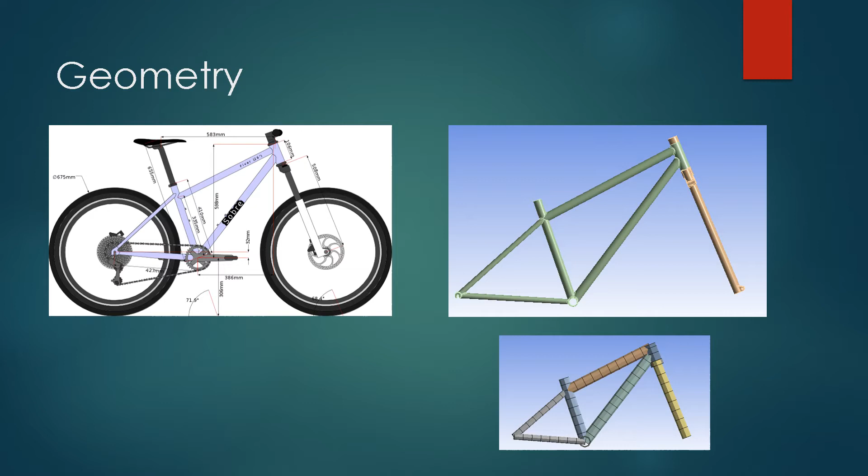The given frame and dimensions are shown in the picture on the left. The 3D model is shown to the right, and below that is the standard beam element model. Our reference frame is made of stainless steel with a Young's modulus of 193 gigapascals, a yield strength of 207 megapascals, and an ultimate tensile strength of 586 megapascals.

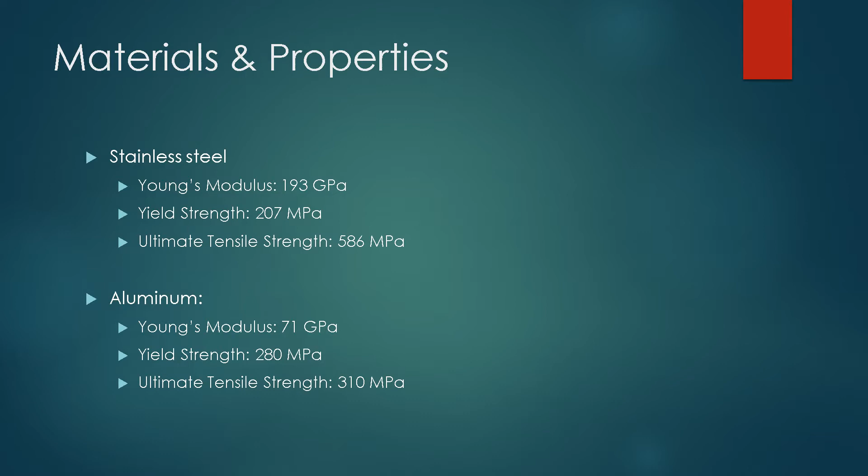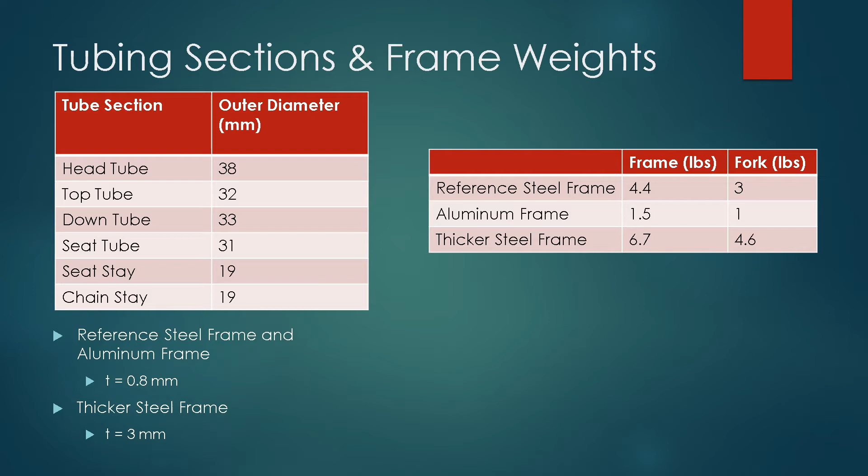We considered two loading scenarios in this project. For the frontal impact scenario, the rear dropouts were fixed and 100 newtons was applied to each front dropout in the negative X direction. For the drop scenario, the seat and the handlebars were fixed and 100 newtons was applied to each dropout in the Z direction.

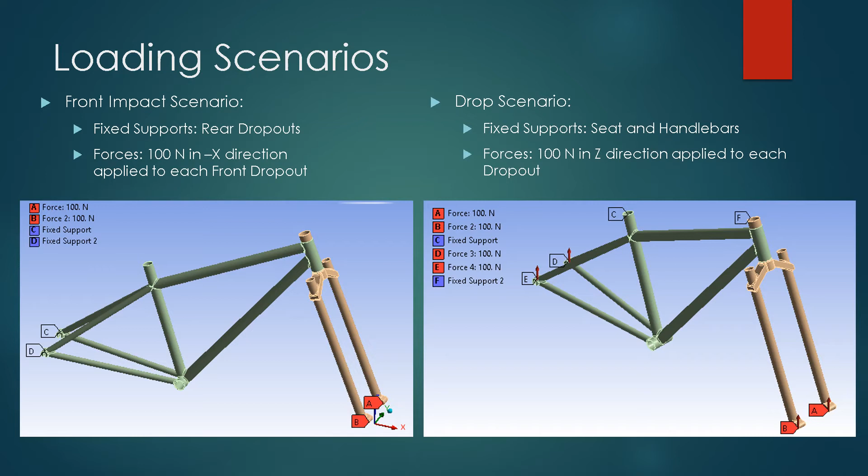ANSYS was used to perform FEM simulations. Modal analysis, harmonic analysis, and eigenvalue buckling analysis were performed for each frame using standard beam elements. Static structural analysis was performed for each frame using a 3D NX model. Fatigue was then analyzed in the static structural analysis.

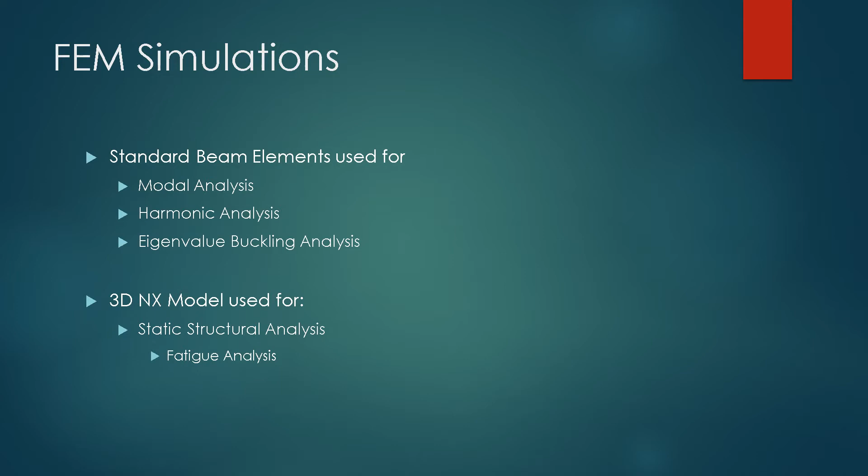For the front impact harmonic analysis, to simulate a rider, there was a 600 Newton force on the seat, 50 Newton force on the pedal, and 100 Newton force on the handlebars. Harmonic analysis was performed in the x-axis of the pedal joint. For this scenario, aluminum had the highest frequency response and the thicker steel had the lowest frequency response.

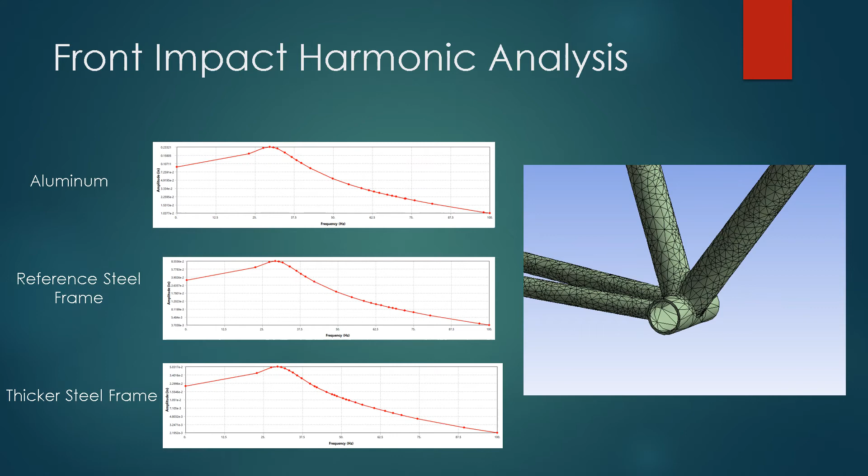The same loading conditions were used to simulate a rider in the drop impact scenario. This harmonic analysis was performed in the y-axis on the seat joint, and aluminum had the highest frequency response while thicker steel had the lowest frequency response.

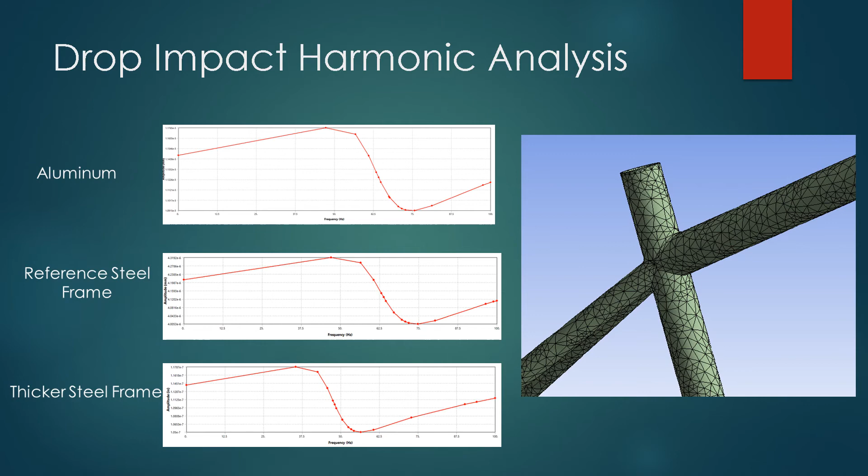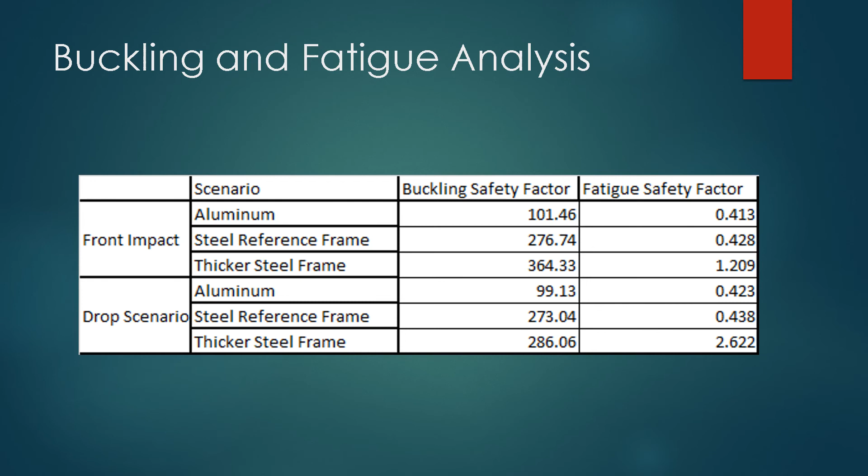For the validation, the stress we saw from the ANSYS analysis was similar to those in the given reference paper, leading us to believe that this was a correct analysis. Although we did get a high buckling safety factor for both scenarios, this might be due to the loading conditions and the boundary conditions that we applied. Changing these and changing the thickness of the tubes might create a more accurate analysis.